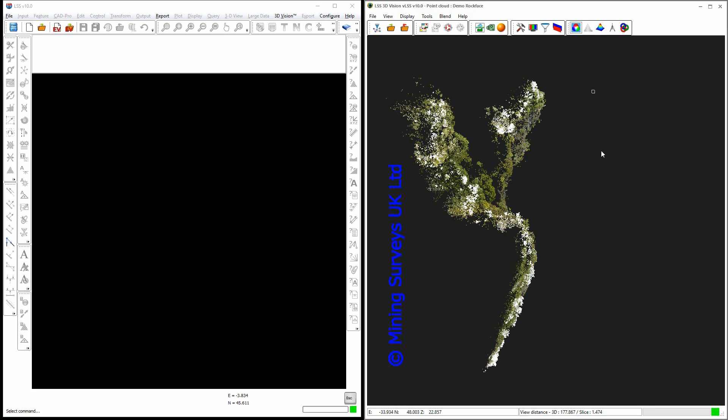First thing I need to do is just position where I want to zoom the eye to, in which case I hold the Shift key down on the keyboard. You see in the middle of the screen I get a little indication of the orientation of the model, and if I now click on a place within the point cloud that I want to focus on, I now click with the left mouse. That has now turned the model round, and when I scroll in with the mouse, it will scroll in and zoom in to that focus point that I've just created.

Holding the mouse wheel down on its own with no keys will drag the point cloud. You can see here that there is perspective in that drag. The mouse wheel back on its own will zoom out, and away from you on its own will zoom in. If we now introduce the Shift key on your keyboard and hold the mouse wheel down, you see a little arrow indicator at the bottom of the center of the screen there. Now when I move the mouse around, it will rotate.

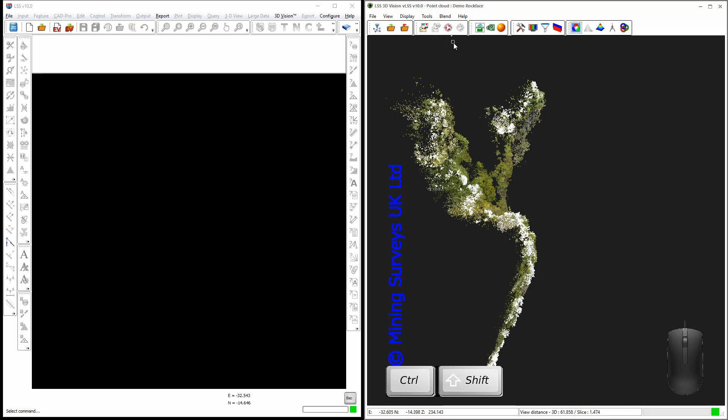Okay. Holding the Shift key down whilst we move the mouse wheel in and out makes no difference. It doesn't cause a problem. But if we then hold the mouse wheel down while still holding down Shift, then it's going to rotate, and it will rotate in all directions and go underneath it, upside down and everything. If you lose where you're positioned, then you can go back to the reset orientation and it will go back to where it started.

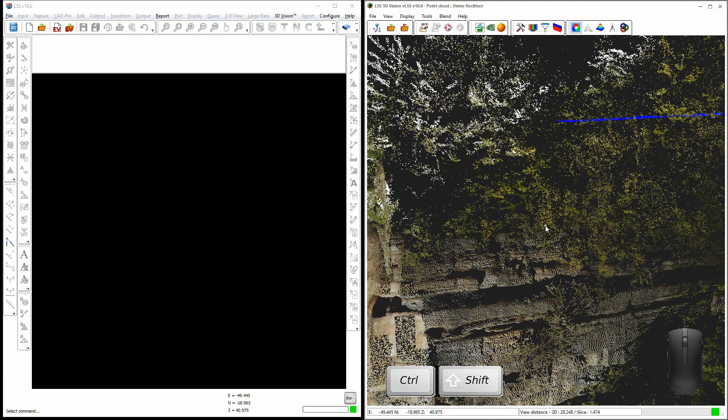So, Shift key down, press and release the left mouse, zoom in with the wheel. Hold the Shift key down again, hold the mouse wheel down, and now rotate. Mouse out, mouse in. Mouse on its own, Shift key, so it's a matter of creating a focus point, and then you can zoom to it, but you won't be able to zoom through that focus point. It's like a length of elastic that you can go out as far as you like, but you can only get to the point where the elastic is attached.

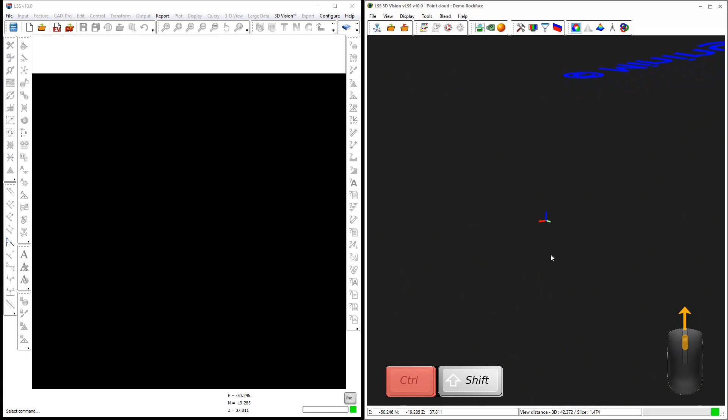To do that and move through, you can hold the Control key down and now scroll with the mouse wheel, and that will go down the line, along the line of the elastic, through the anchor point for the elastic. So now when we do Shift and mouse wheel hold, we've gone through the back of that data set. So we're now on the other side of it. Okay. Takes a bit of getting used to, but it is a very functional way of navigating around the screen.

Let's have a look at some of the general displays. Let's just concentrate on the icons for the time being. This will open up a new point cloud. This will close the current one. This will over display an LSS survey, and what you may have noticed but I haven't drawn your attention to is that in the lower right hand corner of the LSS 3D Vision screen, and also the lower right hand corner of the LSS screen, there is a green indicator. This means that both programs are talking to each other. So they're both able to send messages to and receive messages from each other.

If LSS is closed down, the 3D Vision application stays open, but the indicator says that there is no longer a connection between the two. As soon as I run LSS again, it won't make the connection automatically. The two don't know the other one is there until I hit the indicator inside 3D Vision, and it will now make the connection between the two. Clicking the on indicator in 3D Vision will disconnect. So that's a toggle. The indicator in LSS does nothing. It is just an indicator, not a button.

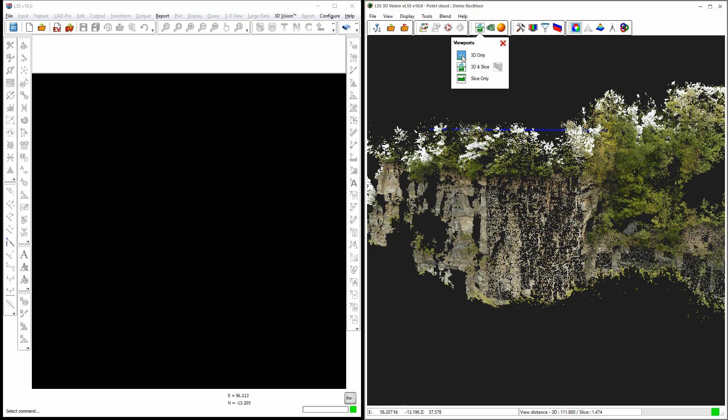I'll come on to the over display when we've actually got something to over display. We can view the point cloud in 3D. We can view it in 3D and slice, or we can view it just in slice. Well, let's try it 3D and slice.

And I'll close that dialog down.

If you could just make out here, there is a red box. This is highlighting what part of the 3D view is being shown in the vertical slice view. If I zoom out into 3D, it doesn't change the display in the slice view.

And I can still navigate around, but bear in mind at this stage, because I haven't frozen this slice view, it's always drawing parallel to the screen. So you can see the red box staying parallel to the screen view.

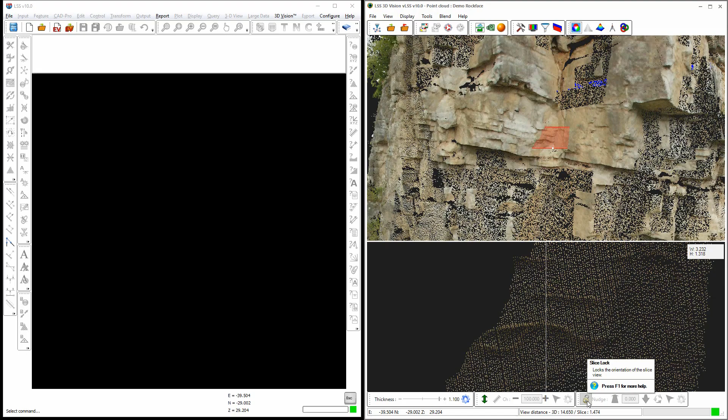In order to fix that slice view along a specific alignment, I would need to freeze that view. That now locks the orientation of the slice, so when I move the 3D view around, the slice stays at the same orientation. What it will do, however, is allow me to move it.

So I'm clicking and dragging with the mouse wheel in the slice view window, and you'll see the representation of where it is in the 3D view. Scroll out means I'm seeing more in the slice, and therefore the box is getting bigger in the 3D view, because this area is covering this area inside the 3D view.

But because I've locked it in position, navigating in 3D isn't changing the orientation of the slice.

There are several controls within the slice view, one of which is nudge away. This is now nudging back into that rock face. It might make it easier if I view it from above. You see it moving away, and you can set the increment, so now when we nudge, it nudges much quicker. This option resets the nudge back to where it was.

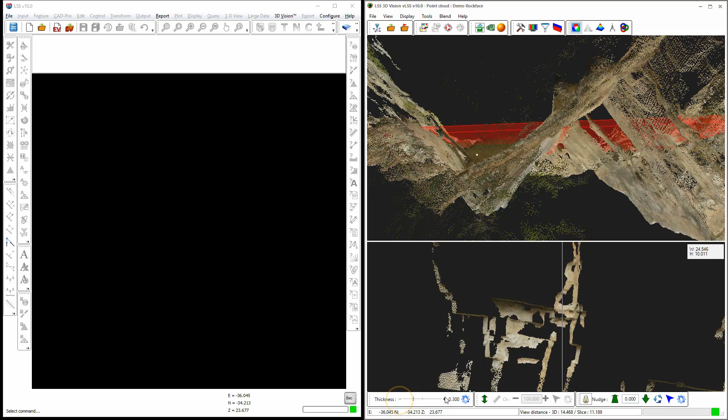In addition to a vertical slice, we can show a horizontal slice. So now we're looking at a horizontal slice through that rock face, and we have the same controls as before.

We can increase the level of it, again with a user-defined increment. Let's make that 0.2. You'll see it going up, down, and moving the slice view in the 3D view perspective. And we can change the thickness as before.

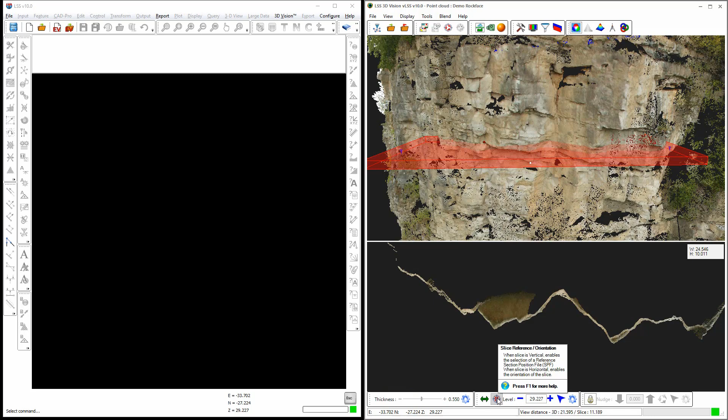This option will reset the orientation of the slice, and when we unlock it we can then move the orientation again relative to the point cloud in 3D.

We can change the display to slice only. Again, horizontal or vertical slice.

We can capture the current screen view. We can capture a full 360-degree panorama image in one of 3 resolutions. This will be useful if you want to display this rock face, for example, on a virtual reality headset.

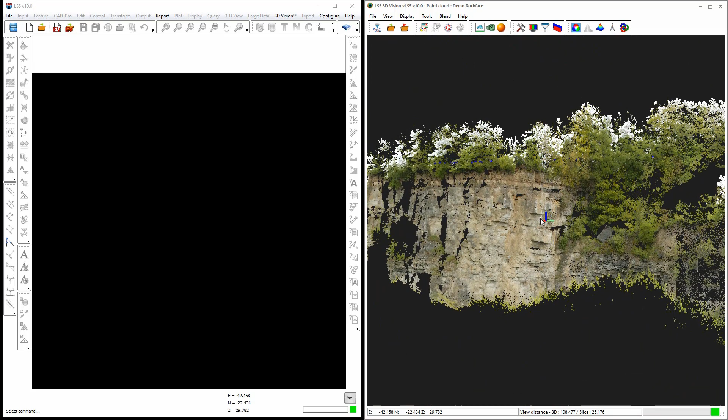Let's go and select that option, and it tells you that it's created a file in that folder, and that is the 360-degree panorama image of that rock face.

I'll come back to Search Sphere in a while.

This option allows us to change the sensitivity of the mouse wheel.

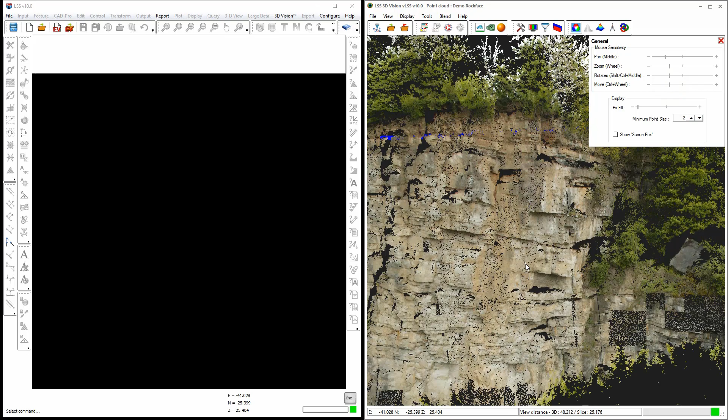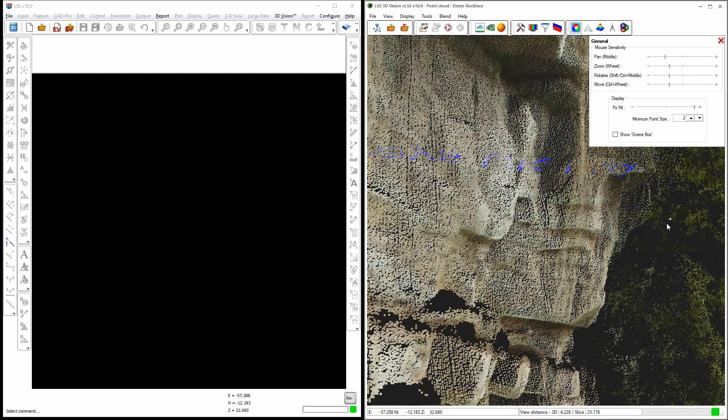In those situations where the gap between the scanned points is leaving a bit of a gap, you can set pixel fill on, and for points that are close to the eye they will get bigger. It won't affect points further away, but it means that as you get closer to them they will fill the gap, so that you have a solid colour shading there rather than small dots with gaps between them.

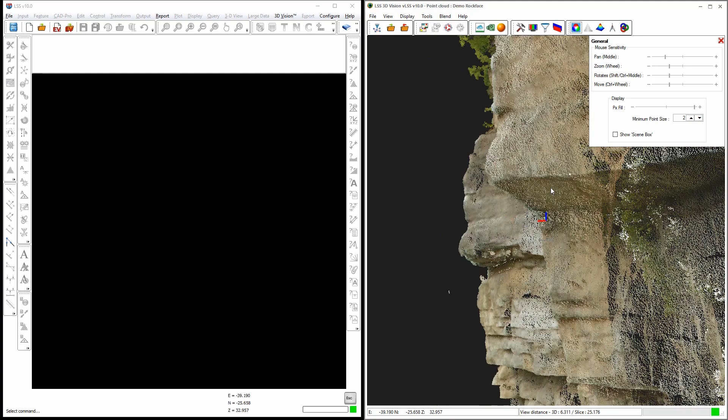This becomes important later on when we're digitizing, because if we're digitizing this overhang here, then we don't want to inadvertently snap on the one behind it. By filling in the gap between the points there's no way that the digitizer will drill through gaps in the points in this part of the rock face and snap on points back here.

Alternatively, what you can do is make every point bigger irrespective of its distance from the eye, and that's another useful tool to use when it comes to digitizing and visualizing.

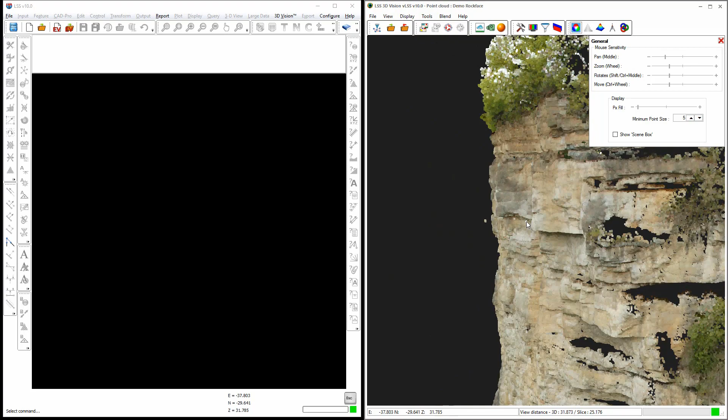Obviously the further out you go the more blocky that's going to appear, because they're going to stay at 5 pixels across.

The scene box is a box which defines the outer extents of the point cloud model.

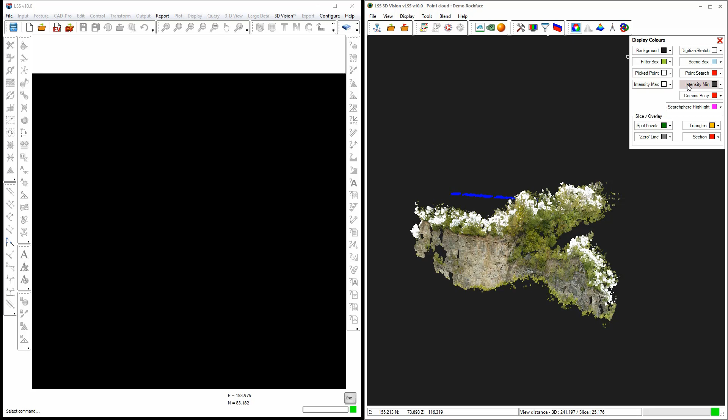This command, display colors, allows you to change the background color and the colors of boxes, such as a filter box, which we'll come onto later, the color of the picked point, and then we can set things like intensity maximum and minimum values for scanned data. So if I say white is the intensity maximum and dark grey is the minimum, and a whole load of various other settings here.

The filter will enable us to concentrate on just a small area of the point cloud. I'm going to select one end of the filter box and then the other end.

The width is the full width of the model. If I say I want to make it 5 meters wide and make it 5 meters high, I can make that box visible so I can see whether it's fulfilling the requirements I'm looking for.

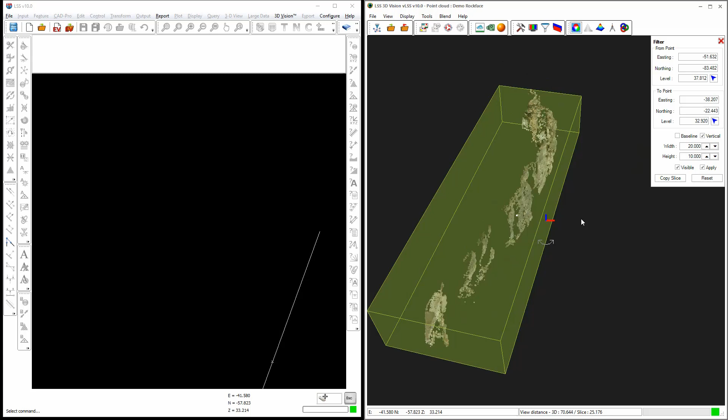So if I make it now 20 meters wide and 10 meters high, if I now choose to apply it, then it will remove everything else from view other than what's sitting inside that filter box. This will become important in terms of removing points, digitizing, and also making sure you don't select points that you're not interested in.

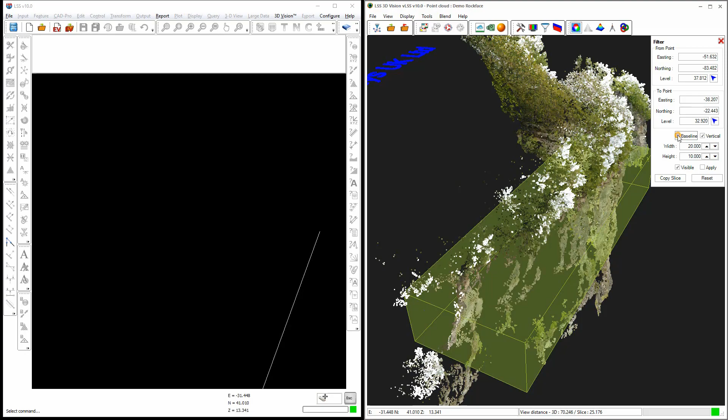The baseline option, what that will do is it will either center the filter box between the digitized points or use the digitized points as the position for the box itself. And vertical or not - if the reference points were digitized on the angle, then turning off vertical means that the box is also on the angle as well.

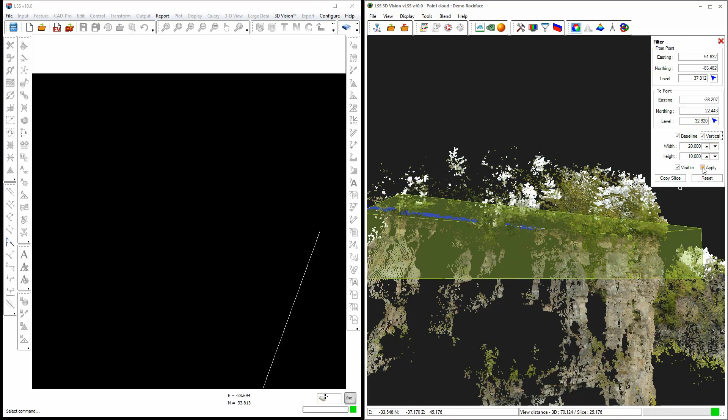The copy slice option will copy the slice view, whatever that may be, and it will copy that into that filter. Okay, back to where we were.

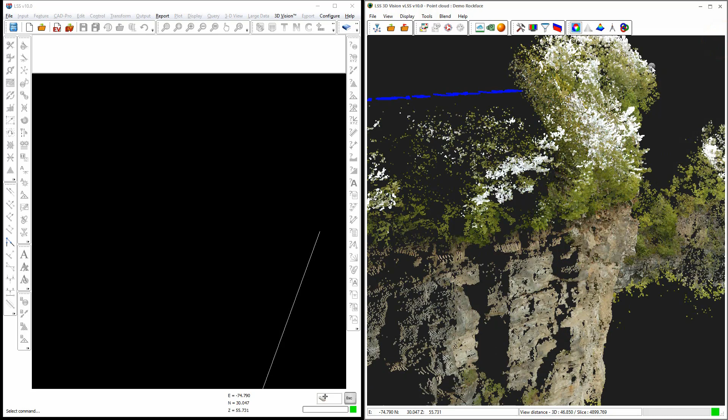This option controls the over display of an LSS survey or the currently opened LSS survey, and we'll come onto that when we've got something to display.

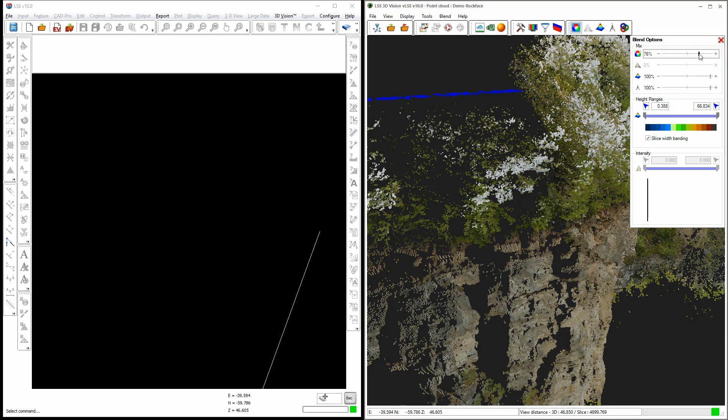And this control here brings up a selection of color options. The first one represents the RGB. This dataset doesn't contain any intensity, so this is grayed out. So we've got RGB right up to 100%, or we can reduce its intensity down, which allows us to mix it with other values such as height range.

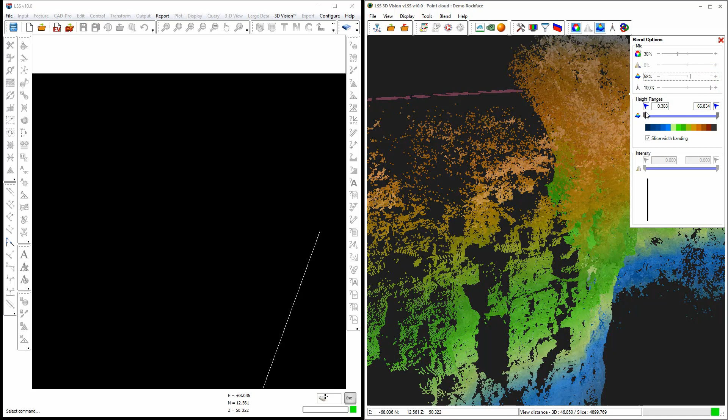And if we do select height range, we can blend the RGB with the height range, and we can select the height range. That's the minimum, that's the maximum.

And if we view it in slice view as well, if we return to this option, slice width banding shows height banding in the slice, and the colors are relative to the distance in front of or behind the baseline, which is this red box here. If we don't make it slice width banding, then the slice view will show in exactly the same colors as the 3D view.

This option is for scan color. This dataset doesn't contain any scan position information, so that's not available to us, just as the intensity wasn't available either.

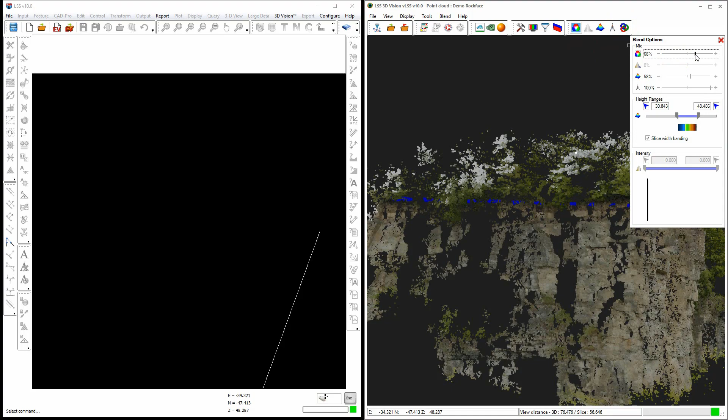So if I turn off the height bands, go back to 3D view only, you see it's gone quite dark. That's because I've turned down the intensity of the RGB values. So I recommend that you just spend a little bit of time with the sample data sets that are on the LSS installation. Try and import and just become familiar with the main controls of the system.

Now we've learned how to import and manipulate point clouds, we're now going to marry it to the LSS software. So we've run 3D Vision and we've run it in split screen, and the indicator in the lower right hand corner of both screens indicates whether we're connected to LSS or not. So if you see a red square in either of those two corners, just click one of them and it will then connect to the LSS software, so we can actually work with the point cloud.

We're opening up a model that's been provided to us by Mining Surveys UK Limited, and we're going to create an LSS survey. And the first task we're going to perform is to extract a digital terrain model from the point cloud data into LSS.

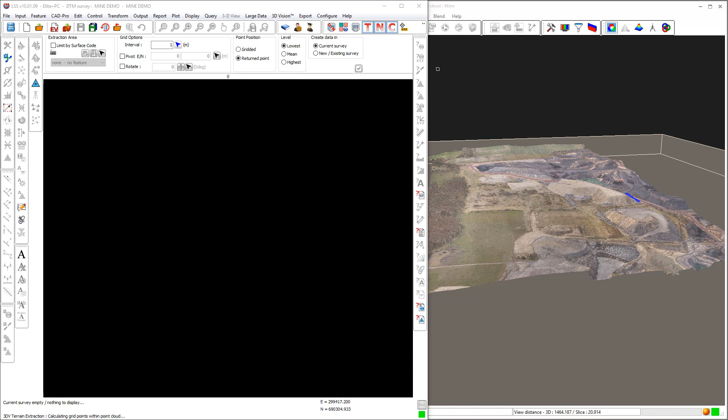It's drawn a box around the entire point cloud, and you'll see a report window appearing which has gone through all of the points, and it is now sending the 1 meter grid data set to LSS, which you'll see in the bottom left hand corner of the LSS screen.

It's finished extracting those points and sending them to LSS. It's now loading them into LSS, and as it loads the points it turns them white, and when it's completed the process of loading them, it will then triangulate the model.

Now I'm showing these two programs split screen, but normally you'd have an external screen. I'm running this on a single laptop, so I've only got one screen, but you could put the LSS program full screen and then run 3D Vision on another screen full screen as well.

Okay, there you go, it's triangulating the data. At this stage we can close this reporting window down if we want to by just hitting the cross. And there it's displaying the triangles.

I've just turned the DTM widget on, and I'm just turning on and off points and changing DTM values and what have you. I'm going to immediately save the survey.

And then back into 3D Vision. Let's just move the screen across so I can see both programs.

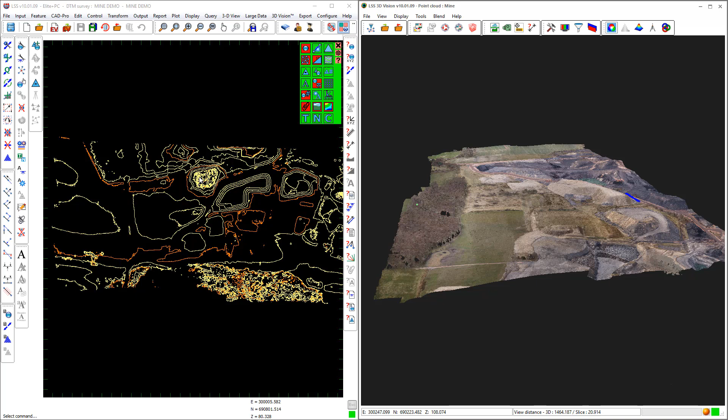Okay, so we've extracted a digital terrain model from the point cloud. There's an interesting area here. If we zoom in, you will see quite an undulating terrain which I wasn't expecting to see.

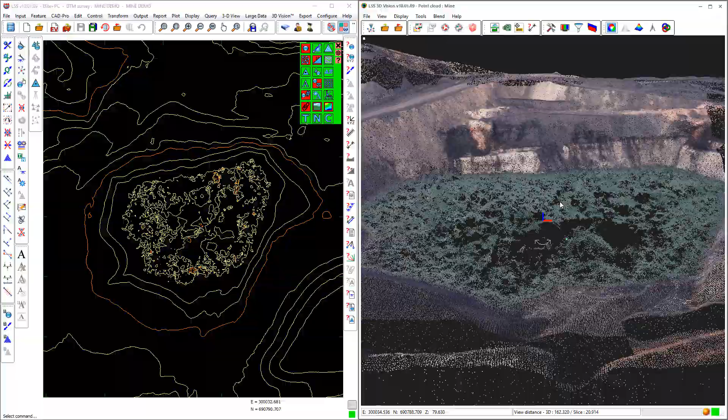Let's see where that is in the point cloud. If we hit this button here in 3D Vision, then it will zoom to that location at the same scale as the LSS view, and you'll see that that is actually an area of water. It's a pond, a lake.

And because this is photogrammetrically defined data, it doesn't like moving water, and it will confuse the model that comes out of the photogrammetric software. So what we need to do here, because you can see this should be flat and it isn't, quite clearly in the bottom right hand corner there in the slice view in 3D Vision.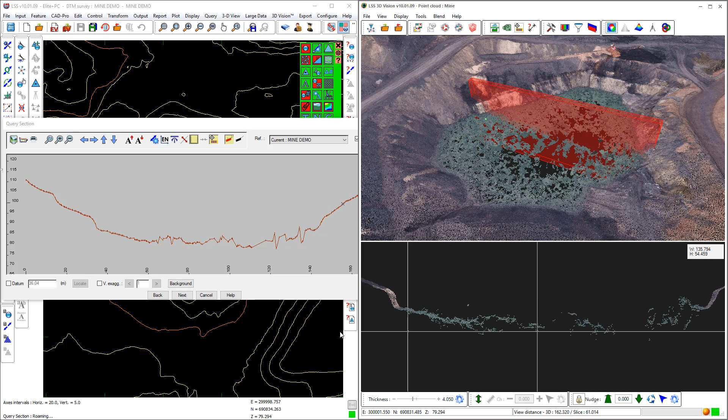So the best way of sorting this out is to use the LSS tools to remove those points. Now the other way of doing it, and I'll come on to this towards the end of this tutorial, is to actually physically remove the points inside 3D Vision, inside the point cloud. But we don't need to worry about that.

We're going to use the LSS tools, and the tools we're going to use here is we're going to digitize around the edge of the water. So this is our first experience of digitizing data straight out of the point cloud.

We're going to feature, insert, obs and link. We choose a specific link feature. I'm just going to use dummy link here, and because 3D Vision is connected to LSS, the option is already defaulting to digitize from the point cloud.

I'm going to digitize around the edge of this water, and then I'm going to add a surface feature in LSS and then delete all the points within it.

In the bottom right hand corner we have the search sphere settings, and in here we can define how we select points. We can find edges, we can find the point nearest to where we click, nearest to the eye or furthest from the eye from the view we're seeing at the moment. We can select edges, find the highest point within the sphere, the mean, or the lowest point. And by search sphere we can define the diameter of the search sphere here. At the moment it's 50 mm.

I'm going to change that to a different value which will allow us to actually see the search sphere a little bit better. Change it to half a meter. I'm going to find nearest to click. It's still pretty small, but as we zoom in you can start to see the search sphere. Let's go and change that size, make it a little bit more obvious.

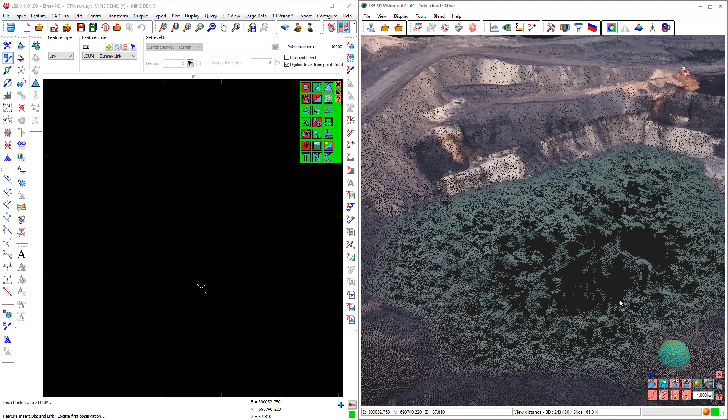Okay, there we are, 4 meter diameter sphere. That means that any points that lie within that sphere, I'm going to pick the nearest to the click. So I'm basically just going to manually digitize around the edge of this water here. Okay. So just digitizing very roughly. It's up to you how you want to do this.

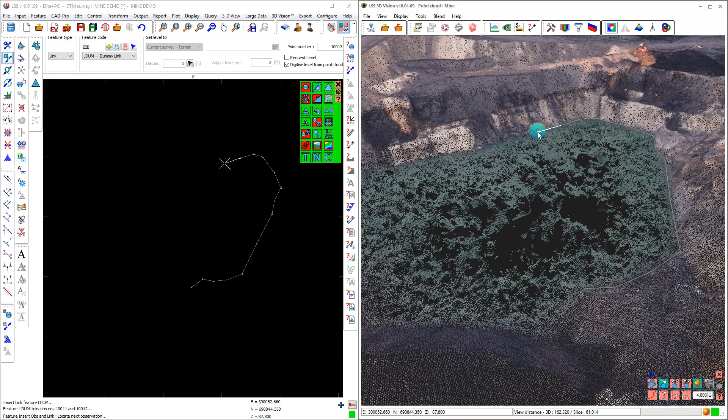Some people actually navigate so that the point cloud is upside down, because sometimes it's easy to find these objects from underneath. So it doesn't matter where you digitize from. You can do it from the other side, or you can do it from directly above, or however you want to do it. So just moving around just so I can hopefully find roughly the edge of this watercourse, and working my way around.

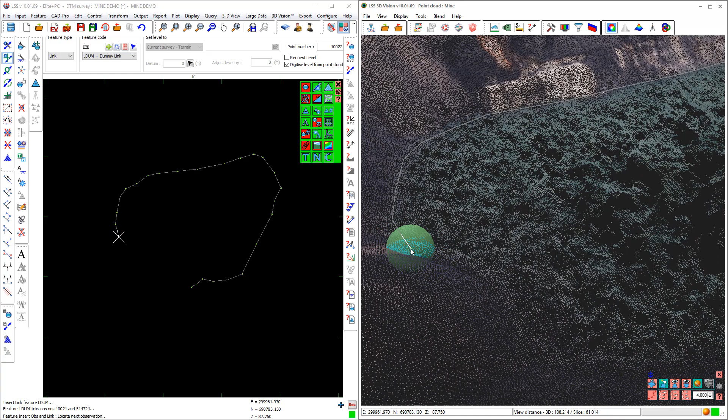Control Z will undo the previous points. If you make a mistake, pick the wrong point, Control Z on your keyboard will allow you to undo that last point, and keep going Control Z and it will undo the points backwards. Okay, so as you can see, you can navigate around. Sometimes when you first try this you end up clicking instead of shifting and rotating and all that sort of stuff, so you might end up putting rough points in there, so Control Z is quite useful.

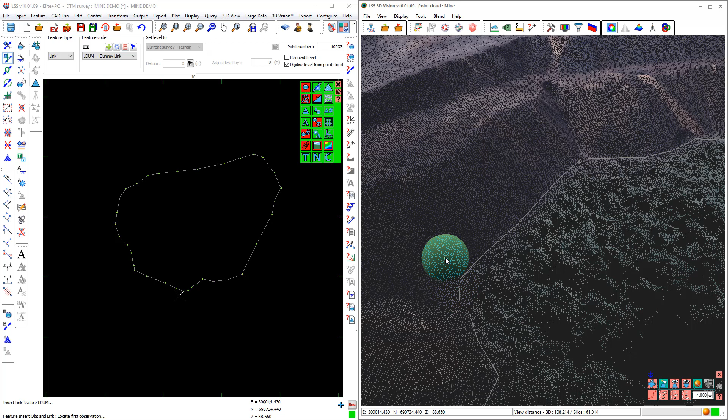I'm going to go almost to the beginning, but then in LSS I'm going to use the quick link option to join the start and end, because I'm going to add a surface feature by enclosure here. So I come out of the other command to just do a quick link. There you go, it's joined it up, and you can see it in 3D Vision as well. I'm now going to add a surface feature by enclosure. It doesn't matter what surface feature I use. I'm just going to use A1, Area 1, fill it in, happy with that, yes.

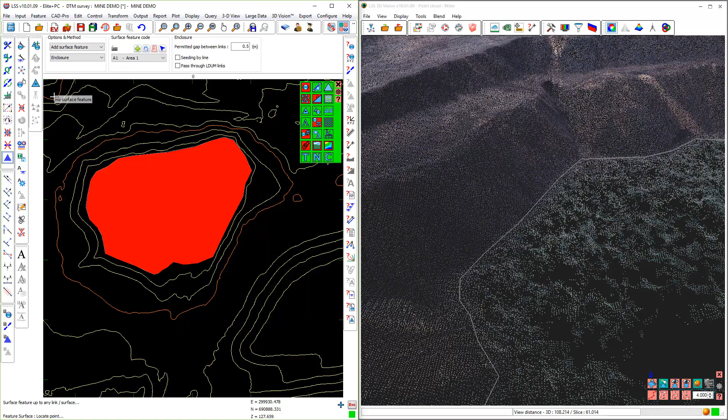And then, so there you go. I'm moving this so you can see the effect I'm going to have on this. I'm going to over display the LSS survey at this point. Let me show you some of the over display functionality. Okay, and you will see the LSS survey now being over displayed. You see the line around the water, and if we go on to the over display settings, we can turn on spot levels, points, and the triangle mesh, and we can fill in that triangle mesh if we want to as well. So you can see the red surface area is highlighted separately.

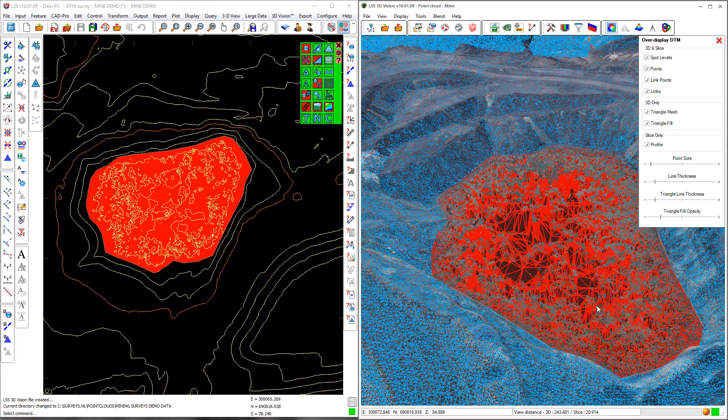We can display the DTM on any profiles, that's the slice view, and we can change things like the point size for spot levels, the line thickness, the triangle line thicknesses, and the opacity of the triangle fill. Okay, so there you go. You can see the triangular mesh, and you'll see how undulating it is actually within the lake or the pond. Let's turn off the points. Okay, those are the various controls that you always have available to you when you're over displaying an LSS survey.

What we're now going to do is inside LSS choose the remove observation within the surface feature. We choose by selection filter, select the surface feature A1 and the points within the boundary but not on the boundary. It's highlighted the points, finish, it deletes the points, and there they've gone from the LSS survey. If we over display the LSS survey again inside 3D Vision, all you will see are just large triangles there going across the water. Okay, there you see.

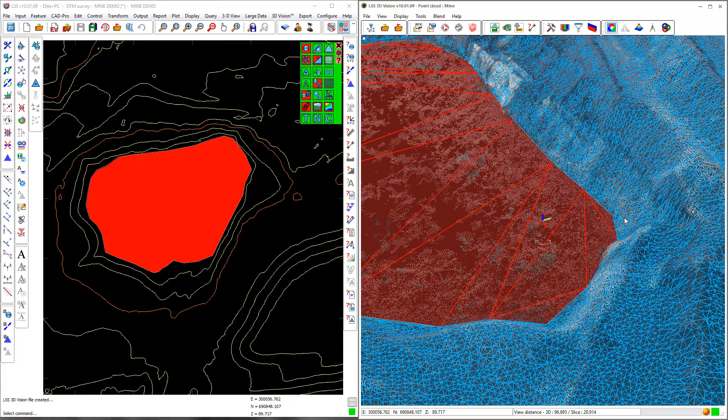And all of those rogue points have gone from the DTM, but we haven't taken them out of the point cloud. The alternative is to remove points from the point cloud and then extract the terrain, but we'll show you that later on. If we just close the point cloud, then we can over display the LSS survey and we can just see the triangular mesh and the points and lines inside 3D Vision. So that's an alternative method of viewing in 3D other than using the LSS 3D view option.

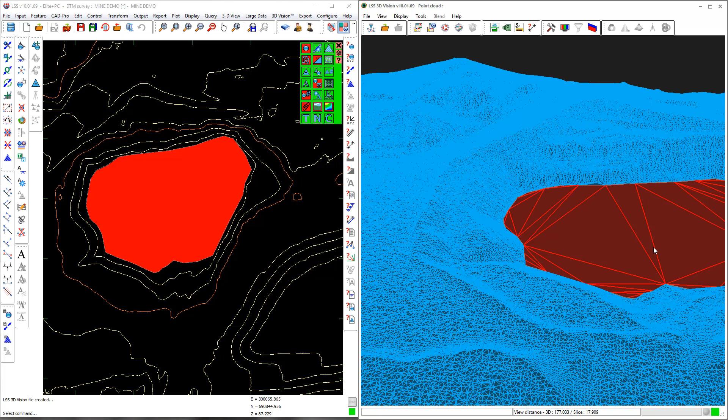Alright, we're going to reopen the point cloud. Let's reorientate ourselves. And I'm now going to show you the digitizing of links within the point cloud. Now this is utilizing the 3D Vision program as a three-dimensional digitizing tablet. And this is where we'll start to use the search sphere settings.

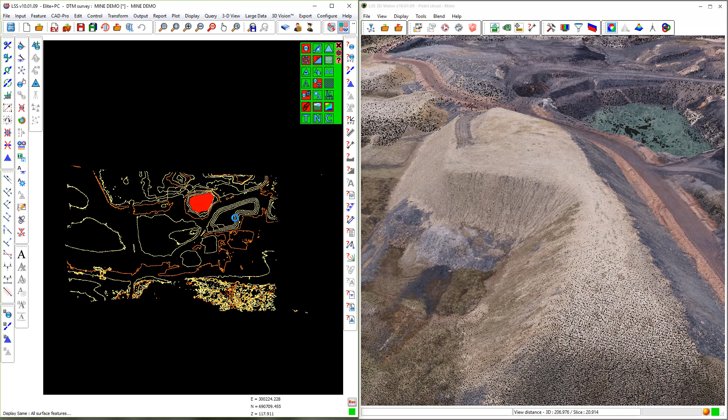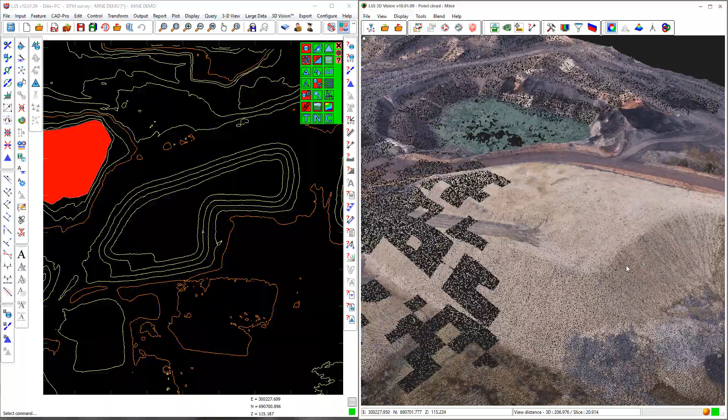Okay, let's zoom in on that stockpile, which is there. So this is the feature we want to digitize. I'm just going to digitize a few points along the top of the bank representing this stockpile. So as before, we go into Feature, Insert, Point and Link, and I'm just going to digitize along the edge of this access ramp onto this stockpile.

And you'll see that I've selected the highest point from within the search sphere, and you'll see that I'm now picking the highest point, even though the cursor doesn't actually have to be very close to the object that I'm trying to digitize. I've now changed it to nearest to click because the break of slope there isn't quite as well defined as it is on the edge of the access ramp. So I'm just doing this by eye now.

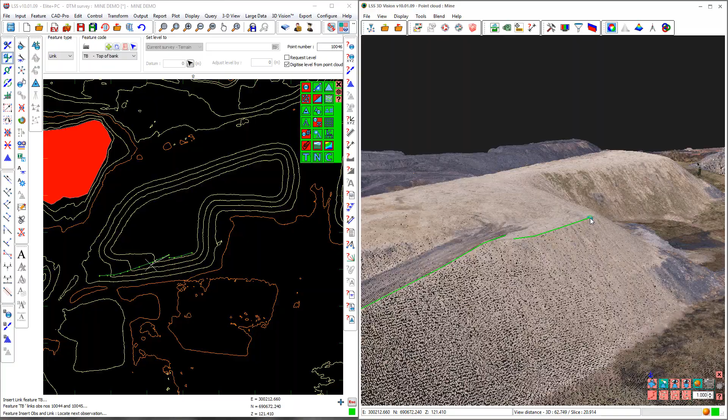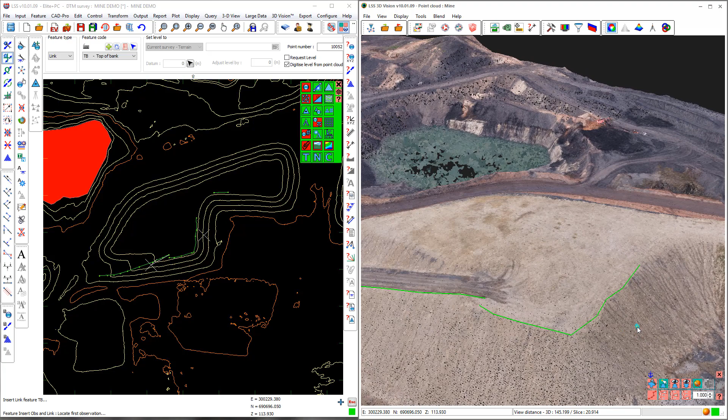And then for more easily definable break lines, I'll be showing you some of the functions that we have available to us within 3D Vision in a different data set, a more hard landscape data set. Okay, so there you go, that's how easy it is. And the points are going straight into the LSS survey, as you can see on the left hand side. And it's updating the model as well as it goes, real time.

Okay, next process. Although I've chosen to export a DTM at a 1 meter interval, there may be certain parts of the model that I want a higher resolution database extracted, i.e. taking into account more points within the point cloud.

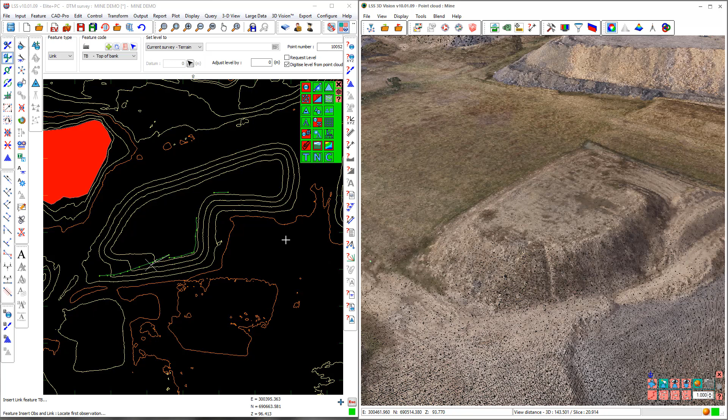So what I'm going to do here is I've zoomed in on this small stockpile and I'm going to digitize a base around it, and again I'm going to add a surface feature to that stockpile using this base as an enclosed line. Okay, I've just edited out the process of just digitizing around there. I've closed the feature off and I'm now just going to add a surface feature just as I did before. I'm going to pick a different surface feature and I'll explain that in a second.

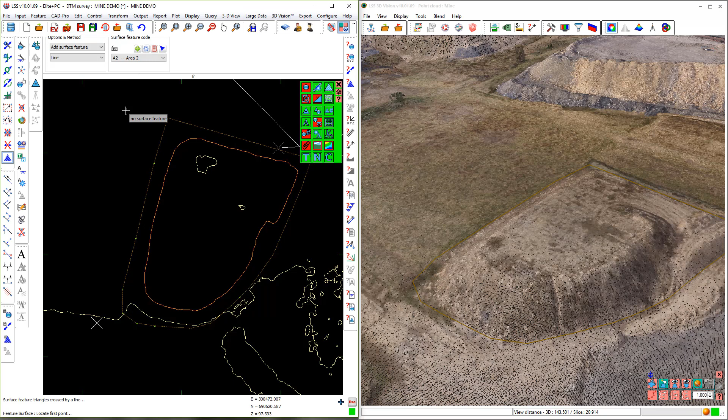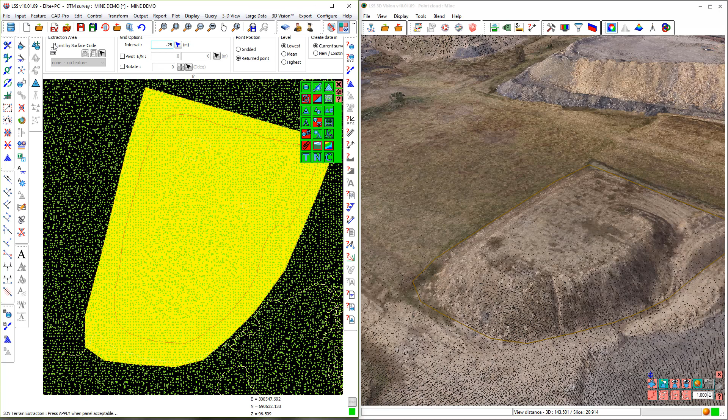Choose enclosure, fill it in, and then I'm going to select 3D Vision terrain extraction, and I'm then going to ask it to extract the terrain just inside that surface coded area. You see the points nominally at a 1 meter interval at the moment. I'm going to extract a terrain at a finer interval, and in this case 0.25 of a meter. I'm going to limit it by surface code.

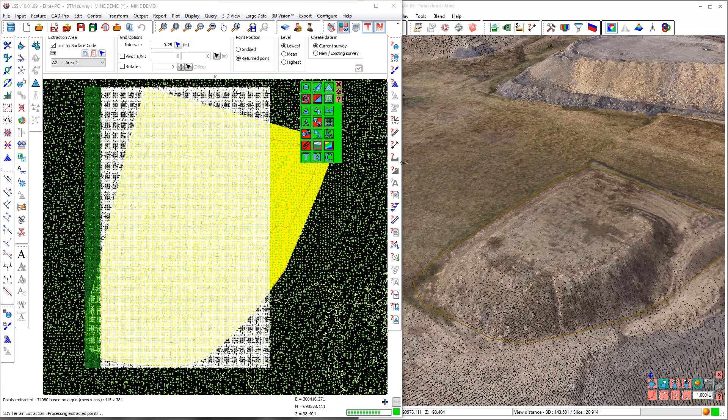If there were several occurrences of that same surface code in the same survey, then it would extract it for all of them together. That's why it's important to make this stockpile a different surface feature to the one we've already used, otherwise we'd get that one included as well. It always draws a rectangle around the whole area, but it will only calculate the points from within the boundary of the surface feature. So don't worry too much that it actually seems to have worked outside of the area. It hasn't. It's just extracting a rectangle, and then we'll only choose the points that lie within the boundary.

And there, once we've loaded the points, they've triangulated. If we now zoom in, just making the screen a bit smaller so we can see all of the point cloud again. If we zoom in, you will see that if we turn off the surface, the space between the points inside the stockpile are much finer than they are outside of the stockpile. Okay, there you go. Alrighty. That's how we increase the density of the point cloud.

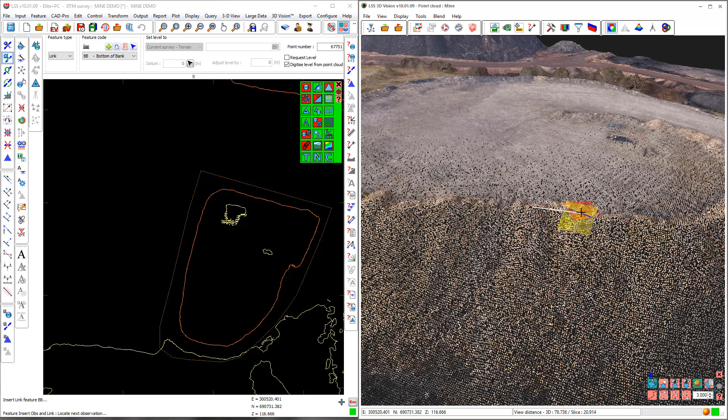I'm now going to show you some of the other search sphere settings, and one of the ones I'm going to show you with this data set is the find edge setting. So if you look in the search sphere settings in the lower right hand corner, you'll see that I've selected the find edge option, and you'll see a yellow and a red intersecting plane, and that is finding the intersection between the sides of that bank, which means that although the cursor isn't actually sitting on top of the bank, it's within the area where we want to find the intersection of two planes.

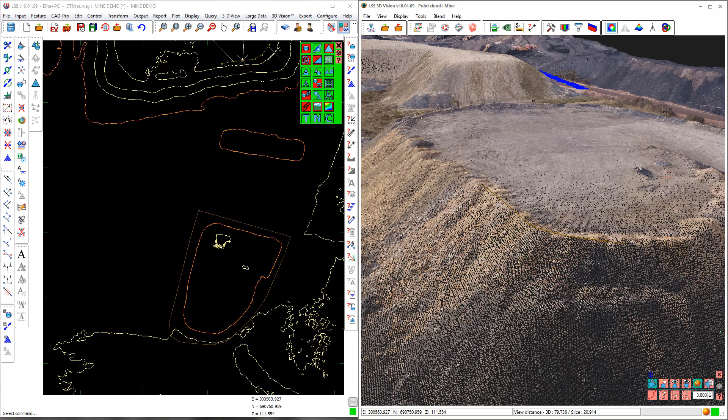So you see that's really a quick way of digitizing tops and bottoms of banks and that kind of thing on reasonably well defined data. But in order to demonstrate this much better, I'll need to open up a more hard landscape data set, which is what we've got here. And I'm going to investigate now some of the different edge streaming and edge detection functions within 3D Vision. So this is the one I've just shown you, which is the find edge.

If it can't find an edge, it will come up with a sort of no entry sign there that says it can't find anything. Just be patient with it, and just bear in mind that if the data isn't dense enough, then it is going to struggle to find edges, so just be careful. But it means that I don't need to put the cursor slap bang on the feature in order to define the edge.

Okay. And then we have a relatively new function called edge stream. And I'm going to start with the between two points option. And you can set up a number of presets. So there are some already in the system, such as wall, curb, stairs, arc, bank, etc. And you can add new ones to that. And within those settings you have search sphere size, you have intersection of angles.

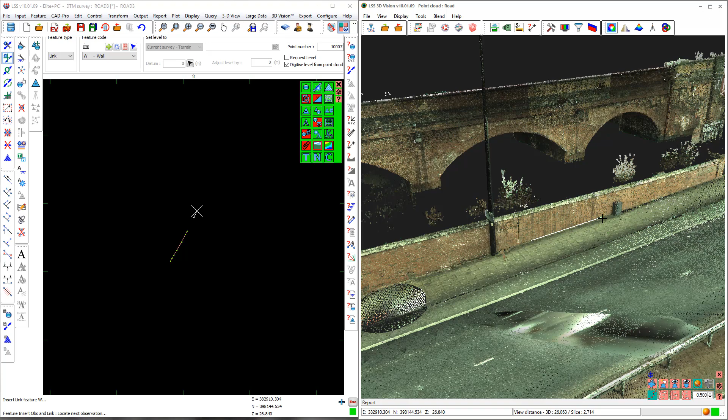So what I'm doing here, I'm going to click one point, click another, and if it can find a route through the edge, then it will draw points all the way along that edge. If you go past an obstruction such as this telecoms box, then it will only be able to go so far. It can't define a path all the way through, so it will stop as it gets to that obstruction. Can you see it? Various different planes involved there. And this is where you can change the permitted angle between edges and between points.

But bear in mind, it won't go through obstructions like that. You'll just need to stop at one side, single escape to free up the cursor, and then you can carry on the other side. Okay. There's the first point on the next section, and there's the second point on the section. And you see it drawing points all the way along the line. Okay. And there you go, there are the points.

And if we query the distance, you will see that these points are half a meter apart. So that's the same as the search sphere size. So that means that we can control the spacing between the points along these streamed edges by changing the search sphere size and also changing the edge streaming search sphere settings to say I want a point every 1 meter, every 2 meters, or every multiple of the search sphere diameter. Let's go back in.

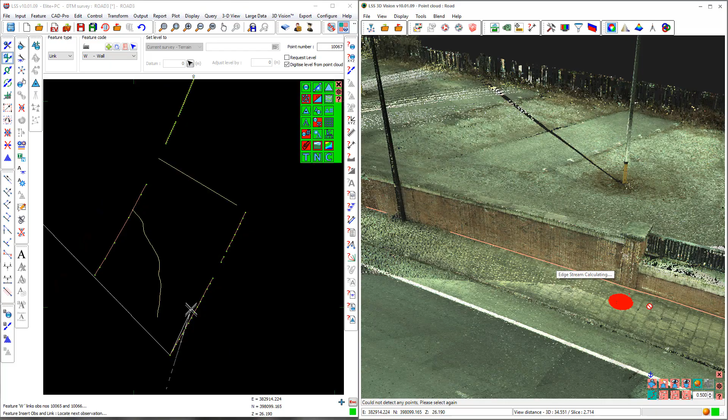So if we turn off the distance option and leave it in 1 point and direction, this time we choose the start and the direction, and it will then go all the way along to the end of the stream that it can find an edge to. There you are, it's stopped at that obstruction, which is that lamppost. And we can start the next, and away it goes.

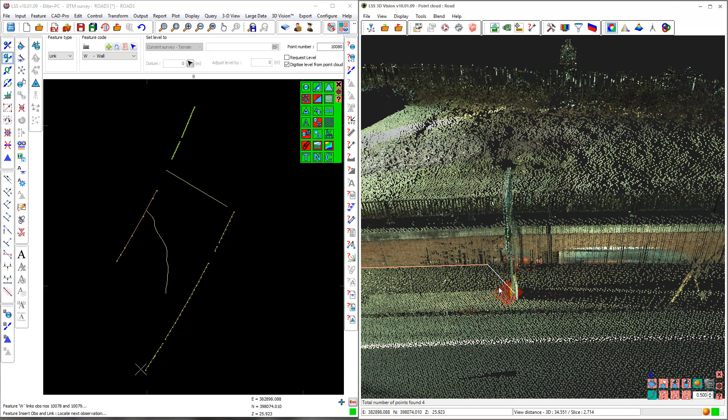The other option is to choose 1 point and it will go off in both directions. This is a really useful function. So it will hit the lamppost on the left hand side or go within 1 search sphere of it, and then on the right hand side it will again stop at the next obstruction. Alright, so that's quite a powerful set of options, but obviously very much dependent upon the quality of the data.

And I'm going to show you the multi-feature bar. So what I've done is I'm going to digitize across this road. I'm going to do it very quickly here, so you would do it in a lot more detail. And for this, we would normally set up a section position file that will run along, for instance, the center line of a road or along the edge of a curb or whatever it is. If you've got a linear feature and you can define it in the point cloud, then you can set up a section position file to follow.

So you'll see here we've got a wall, we've got top and bottom of curb, we've got central reservation, and then we've got features repeating on the other side. Okay, so let's get the screen orientated and let's create a section position file. So configure SPF create, give it a name.

I'm going to leave the default settings, which is a 10 meter section interval with a left of 10 meters and a right of 10 meters. Oh, by the way, I've just created an empty survey here on the left hand side in LSS.

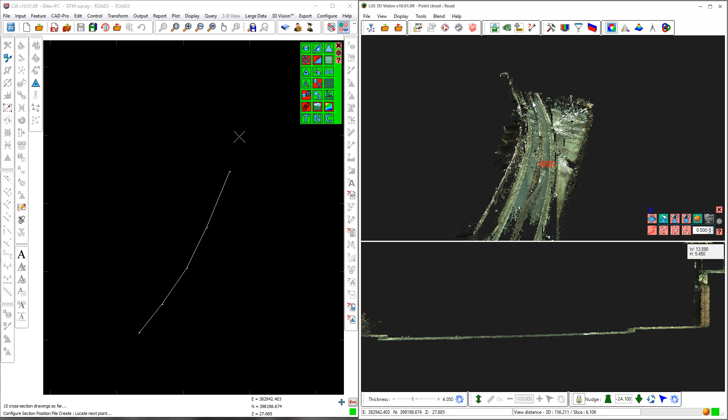I now, using the search sphere, just say I want the points to be defined by nearest to click. So as long as there are points within the point cloud I can click on to define the center, I'm just going to digitize a few points along here. Okay, so escape to finish and end and save.

And then in 3D Vision, go to 3D View and Slice, select the chainage and select the section position file, and you'll see the section displayed in Slice View, and at 0 chainage we're ready to start using the multi-feature command. And for that we choose the command 3D Vision link multi-feature.

We get a display of all of the legend entries for link features, and I'm going to clear away all the list that I had previously from another demonstration. I click my first feature, which in this case is wall. The next feature is going to be top of curb, add that to the list. The next one will be bottom of curb, or just curb, whichever code you want. It's entirely up to you how you do it. And in fact, it doesn't really matter what code you use.

So add that. So I'm going to have wall, then top, then K, then I just pick another one, center line, and then I'm over on the other side of the road. I'm going to pick up curb again, then top, and then wall again. And there you go, we're ready.

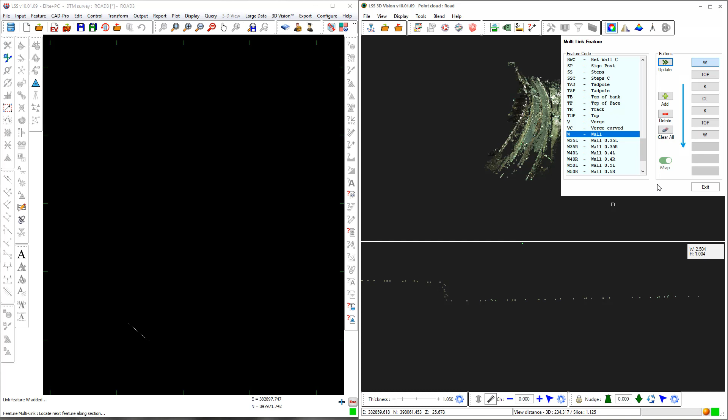If I choose wrap, it means I can go from left to right and then move up a chainage and then go right to left. It saves me having to keep moving the section left and right as we go. Now ready to start digitizing.

It's highlighted the W code at the top, so I click on that and you'll see it automatically advances to the next code, top, then to curb. See down the right hand side there, it's moving down the list. Then I haven't got a center line, but I'm just going to click anywhere in the middle somewhere. Then curb, top, wall.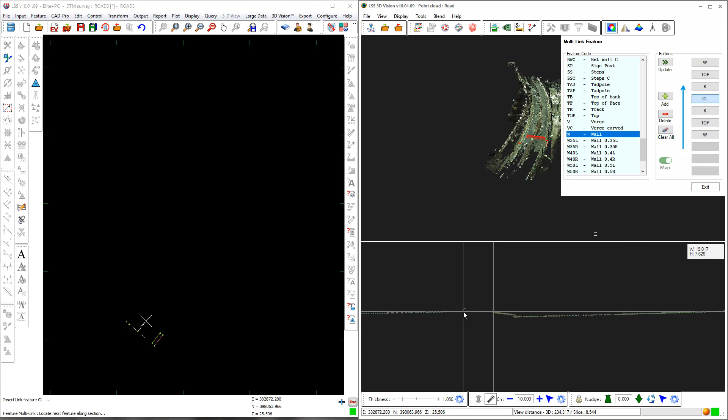And what I need to do now is advance the chainage at the bottom there, press the plus, and it goes up one, and the arrow on the right hand side there in blue is pointing up, so I just go back up the list this time. So that's the advantage of using the wrap option. And in LSS on the left hand side you'll see it joining up the link features as if we were surveying them all individually. Up a chainage and then back along the road.

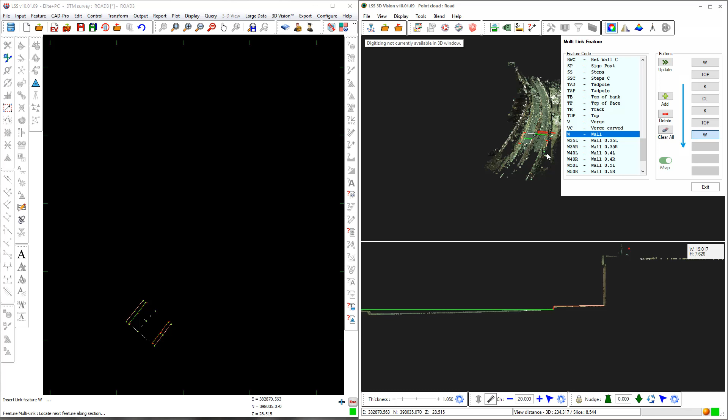Clearly if you had a full screen you'd be zoomed in much more than you are here, so you would have much more precision. It's not snapping on points here, it's snapping on the intersection between the vertical and the horizontal guidelines there in the slice view. So it's drawn those features in LSS on the left. So we're going down, we've advanced a chainage, and we're now going back up through the list again.

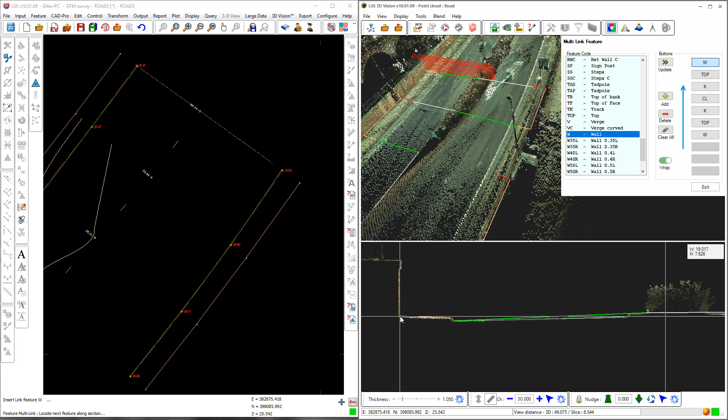Okay, I've just spotted a slight anomaly in the 3D view screen, that it's actually showing the lines drawn across the feature as well. That's something that will be sorted out in a future release, so ignore that. It should be joining the lines along the link feature. Okay, so that's how MultiFeature link works.

I mentioned right at the beginning about how we delete points within the terrain model once we've extracted it, but another way of doing it is to delete the points inside the point cloud itself. So if we go to 3D Vision Edit, Remove, we can use a variety of different methods to delete points, in this case trees that we don't want to be included in any terrain models.

The first one is using this search sphere. So I'm going to make a very large search sphere. The maximum you can have is 25 meters, but I'm choosing 20 here.

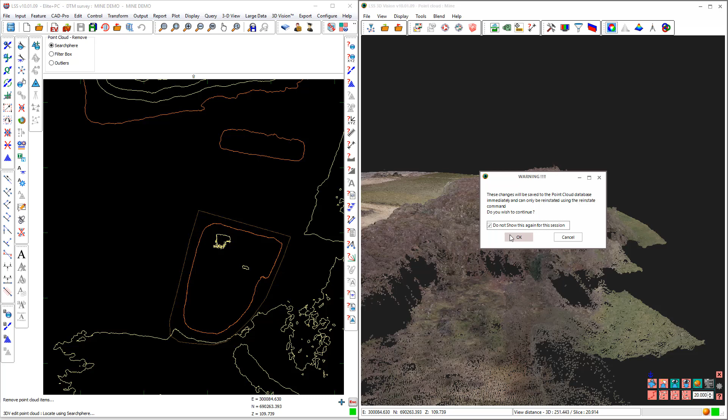And you will see it's highlighting the points within the point cloud that lie within that search sphere, and as soon as I click with the mouse it will remove those points from the point cloud database. It gives you a warning the first time, which you can tick to say I don't want another warning, which is basically saying these points are being removed live from the LSS-PC point cloud file.

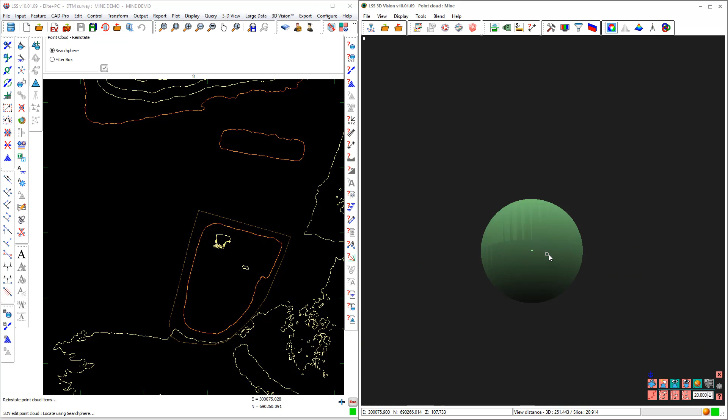Don't worry, because you can reinstate them, but it's always worth taking a copy of your point cloud, your LSS-PC file, and working on a copy just in case you can't be bothered to try and reinstate them. So if we go to Edit, Reinstate, it highlights all of the points within the point cloud that have been removed. They're not physically deleted.

And there you go. Now bear in mind, if we have removed points, when we choose the command 3D Vision Export to export it back out as an E57 or a PTS file, it will not include the removed points. So removed as far as LSS is concerned, but deleted as far as any export is concerned.

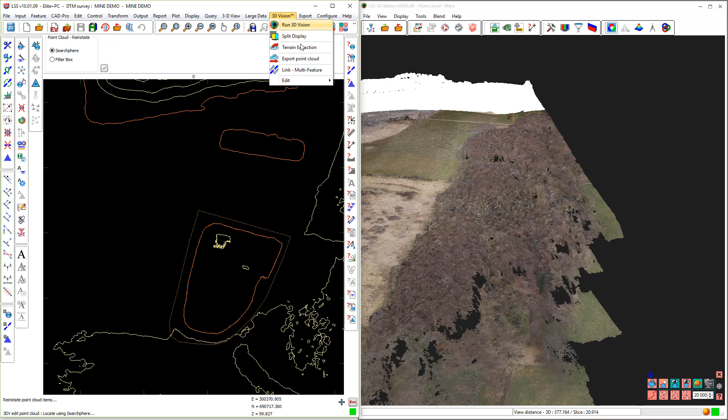Back into Edit, Remove. This time we choose the filter box option, and this allows us to select a box within the 3D Vision point cloud, and this is a rectangle that has a limit on its width, length and depth. So we select the first point, again using the search sphere settings that we've got set in the bottom right hand corner. Second point, it draws it the full width of the point cloud.

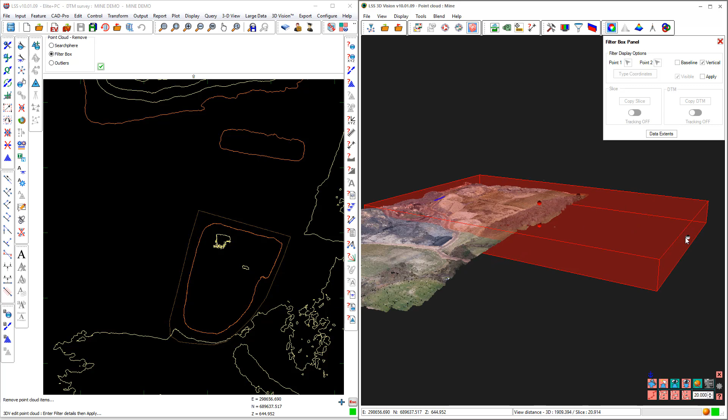The quick way of sorting that out is to go to the option at the top, which allows us to dynamically edit the dimensions of the box, and you'll see little balls on the end of the box there, and you can drag those. Just make sure you're not looking at them front on, because if you're trying to move them away from you, then the precision of movement is going to be very restricted. So always try and move them so they're not directly front on.

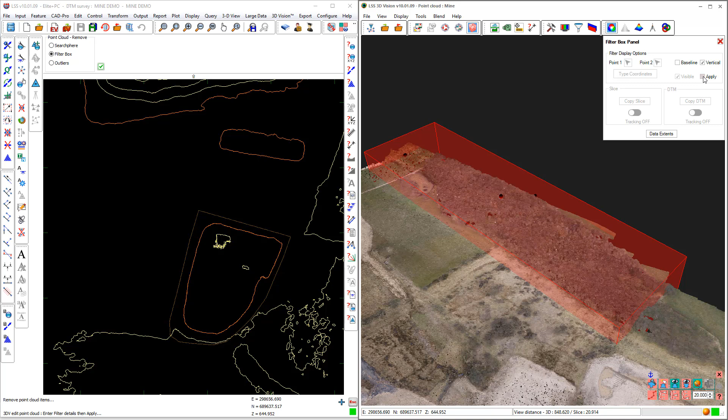You see, that's much more severe there because we're moving into the model there. There you go. So you can look at it from all directions. Some of these control handle balls may be under the model, so you might need to manipulate the model around. Okay, so we're seeing it. We've got options there. We can apply it, and apply it will just turn off everything that isn't actually inside that filter box. So when it comes to deleting, we can select the tick box that says now delete everything that sits inside that box.

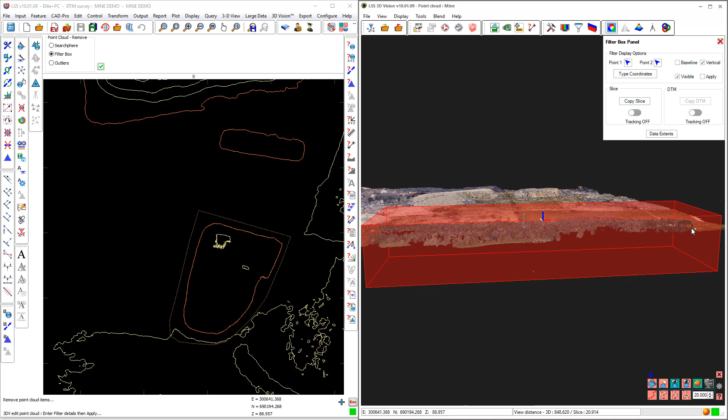Other options we've got for that filter box is, if we choose baseline, what it will do is it will choose the digitized points as the base of the box, and if we turn that off, then it will center the box on the digitized points. So if I redefine the points again, there you go, it's moved it down because the point I picked was much lower down this time. Okay.

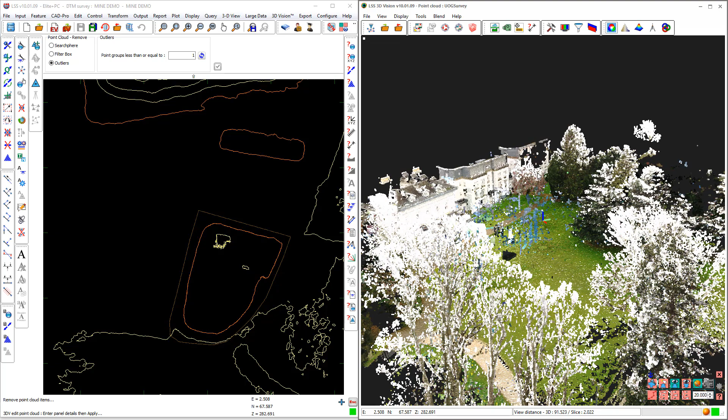And we have a variety of different settings there for copying the slice view, turning the tracking off. So as I move the slice around, move the model around, then it will move the filter box with it. The other option in there is outliers. I'm going to pick a much more sparsely populated model, and I choose the outlier option.

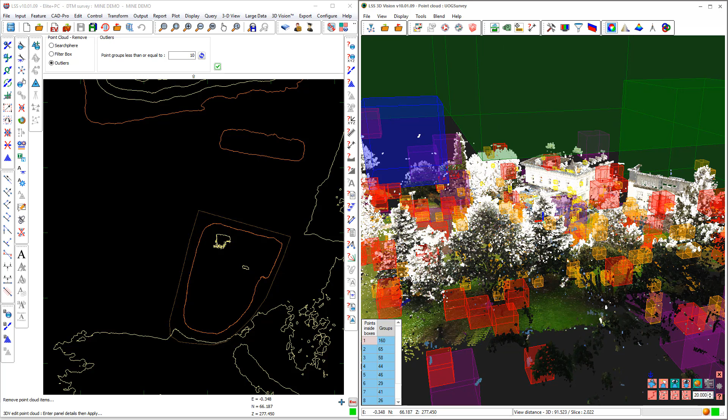Say I want to find any boxes within the database that have fewer than, in this case, 10 points. So I've typed 10, hit the refresh button, and it's now found every three-dimensional octree box within the database that contains 10 or fewer points. And as soon as I hit the tick box, that will actually remove all of the points within all of those boxes. As you zoom in, you'll see more and more boxes. It will only delete from the boxes that you can see on the screen at this zoom position.

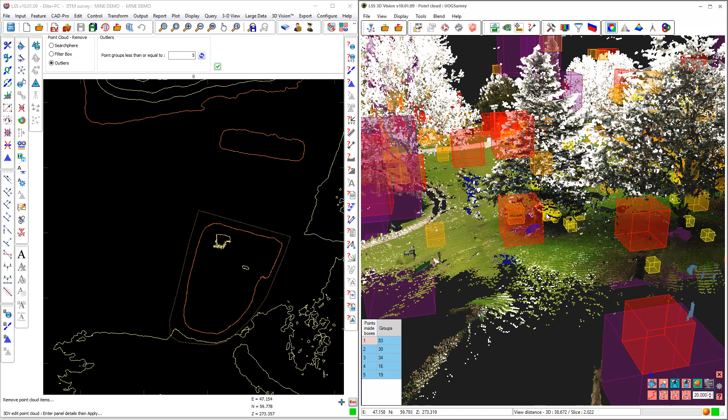Okay, so as you can see, as we zoom in further, more boxes will appear because they're smaller boxes in the database. Imagine each of those red ones has got smaller ones in it, yellow ones. So the colouring doesn't indicate the size of the box, but it's just a random colour selection. So you could actually zoom right in and you'll find lots and lots of small boxes that you can remove. This is generally useful for removing things like trees and what have you. Anyway, that's a quick run through.